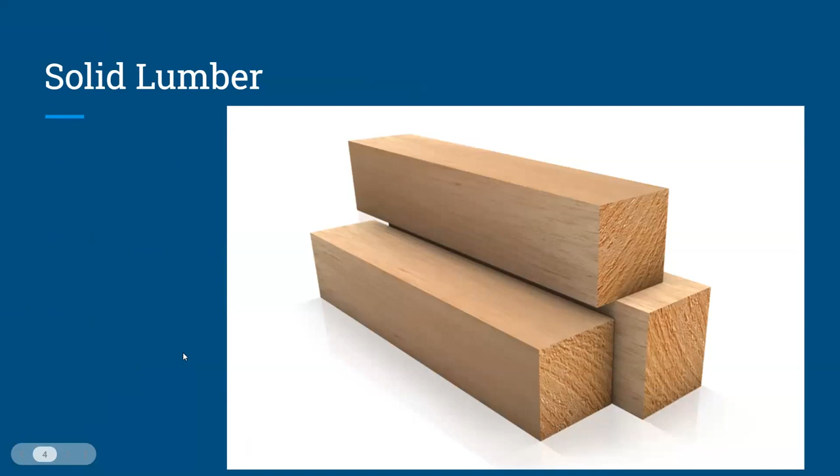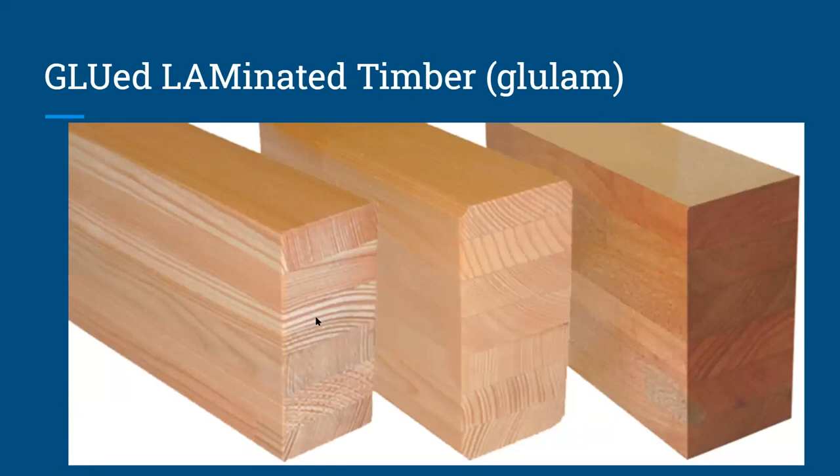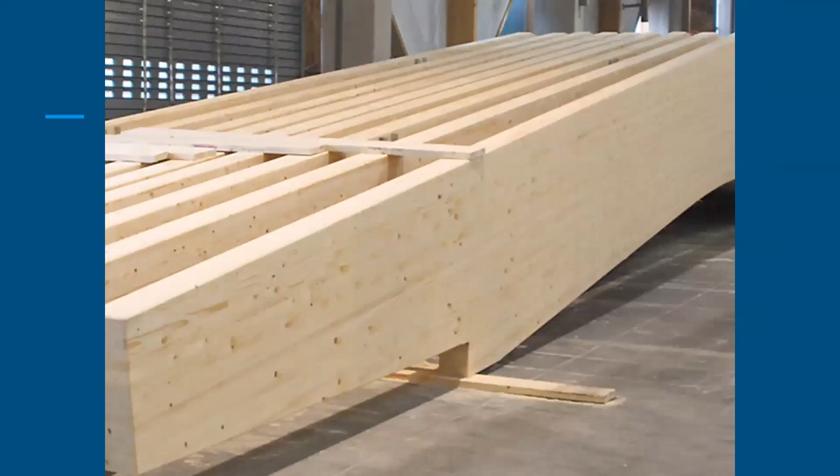Now, for the current use, as structural engineers, we can use solid timber, but increasingly we are switching to glue-laminated timber, where individual parts are glued together to form larger cross sections. With this technology, you can not only have curved members, but also very deep cross sections for columns and beams, and you can span larger distances. Timber being lightweight combined with high strength is a structural engineer's dream. Today in the United States and Canada, 95% of houses are made out of timber, whereas it is less than 5% in Turkey.

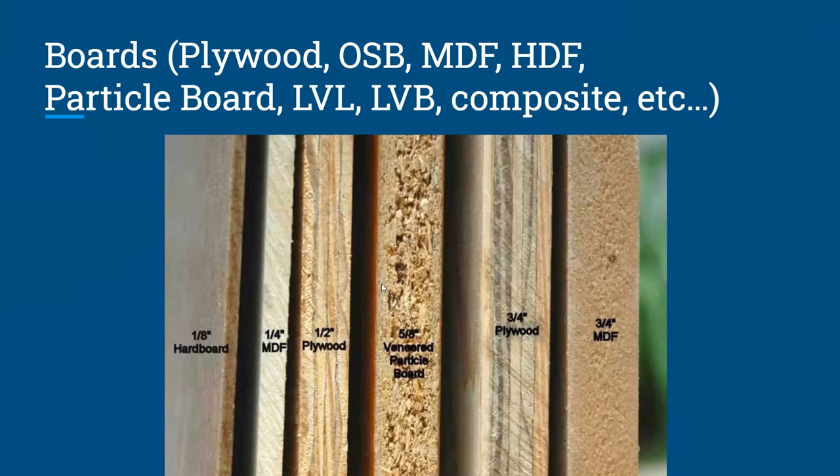There is a relatively new technology called cross-laminated timber. It is like glue-lam, but the orientation of the members alternates 90 degrees to each other, so that you get a plate that can be used as a shear wall or for the slab. Finally, all the sawdust from cutting timber can be glued together to make particle boards—MDF, HDF, or coarse particle woods—or you can shave timber from trees into thin slices and combine them as plywood, LVL, LVB, and other materials.

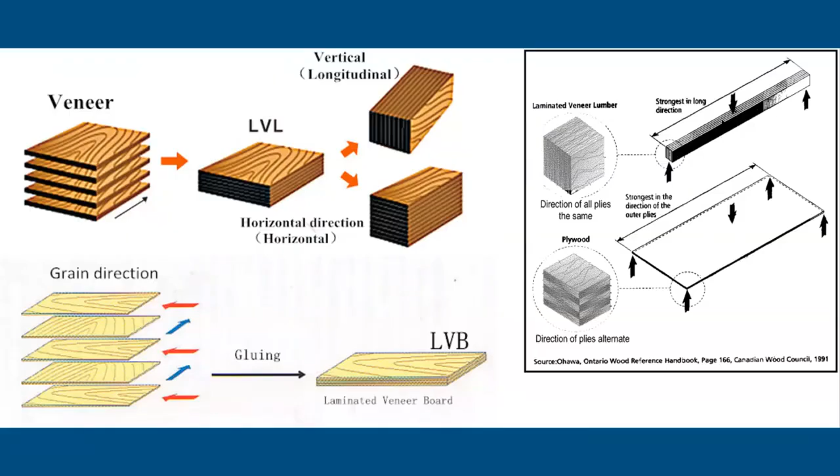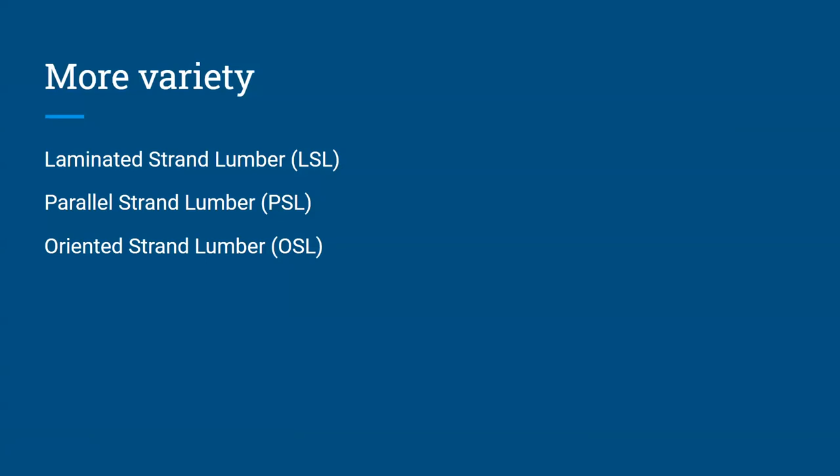There's a major difference between LVL and LVB or plywood: the layers are either 90 degrees or parallel to each other, at 0 degrees. So they are used either as a plate, or as a beam, as a structural element. There are more varieties—there's no time to go into each sub-segment—laminated strand lumber, parallel strand lumber, oriented strand lumber, and composites, of course.

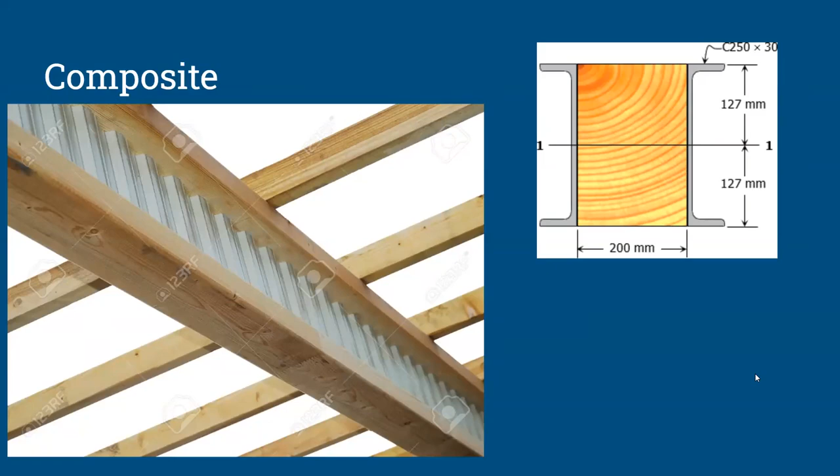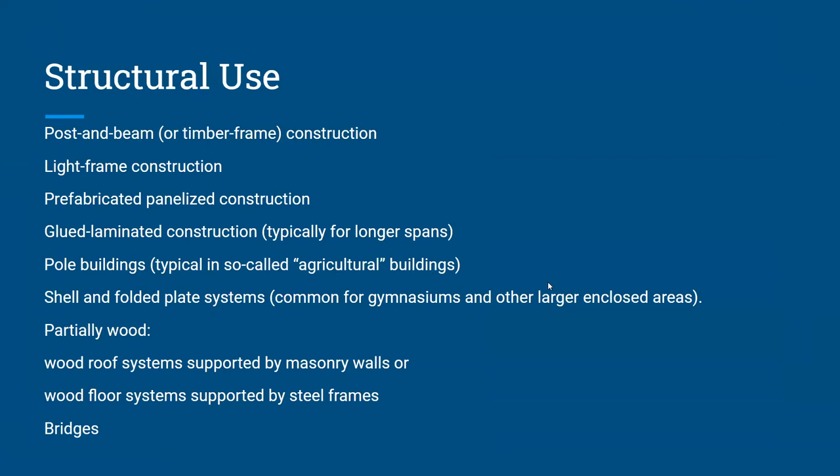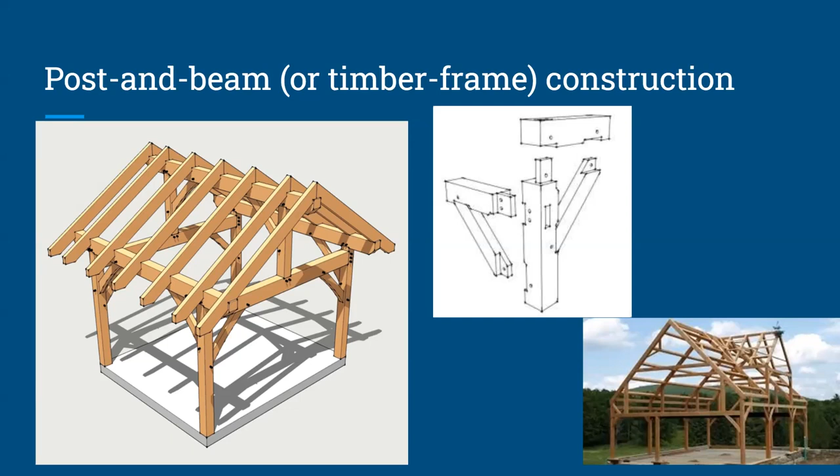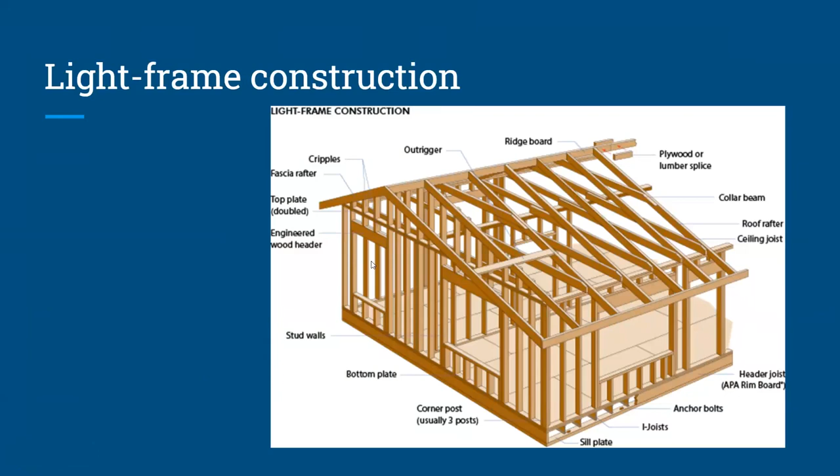The structural use of these materials can be categorized in a variety of ways. I will mention a few that are most frequently used. Post and beam method is just like what we are used to with reinforced concrete—we have columns and beams made out of timber. There is light frame construction where the load is carried by the walls instead of columns, as you see here. This is very frequently used in America too, for private houses as well as apartments.

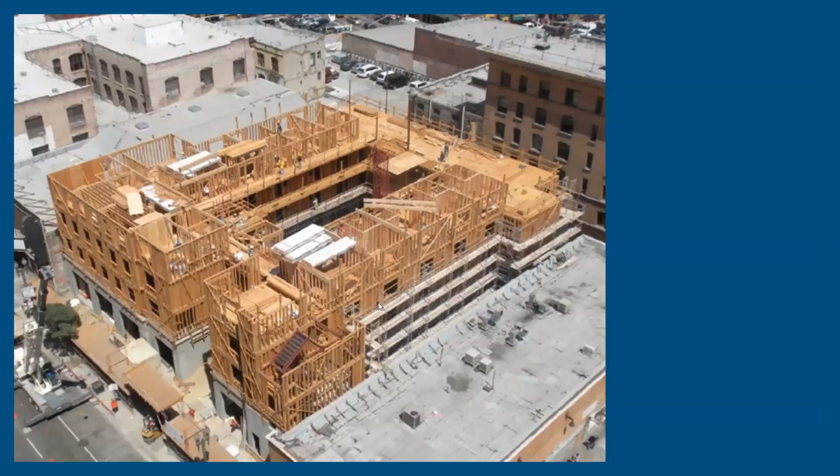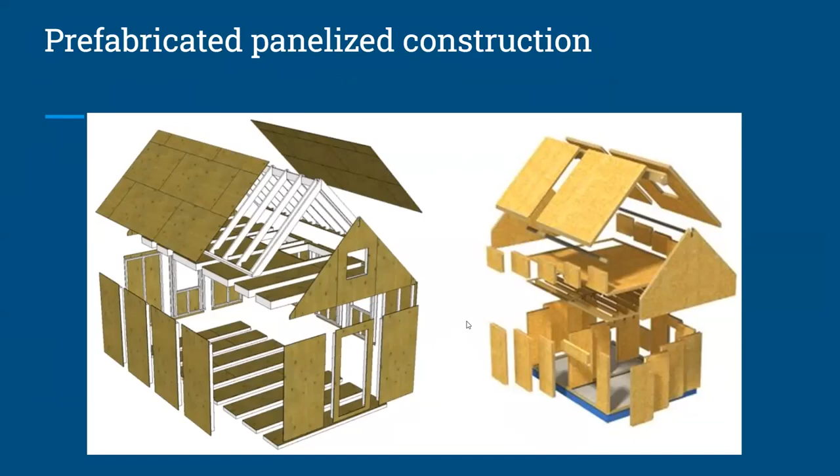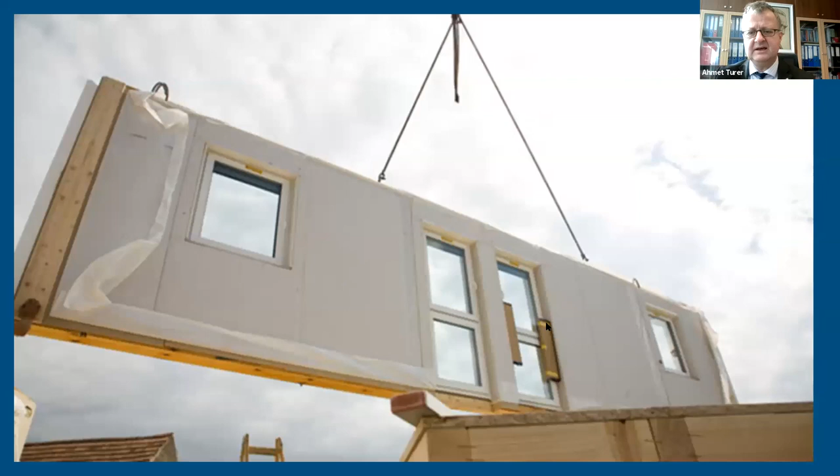You can go easily up to 10 floors. Sometimes the first floor is out of reinforced concrete just to keep the humidity out, but it is not mandatory. There is the prefabricated version where most of the construction is completed in a factory and combined on site, which is very fast construction. There are some nice examples, as you see here. Sometimes it even comes with the window and door openings already installed. This CLT construction is an example of prefabrication, and it's very fast construction.

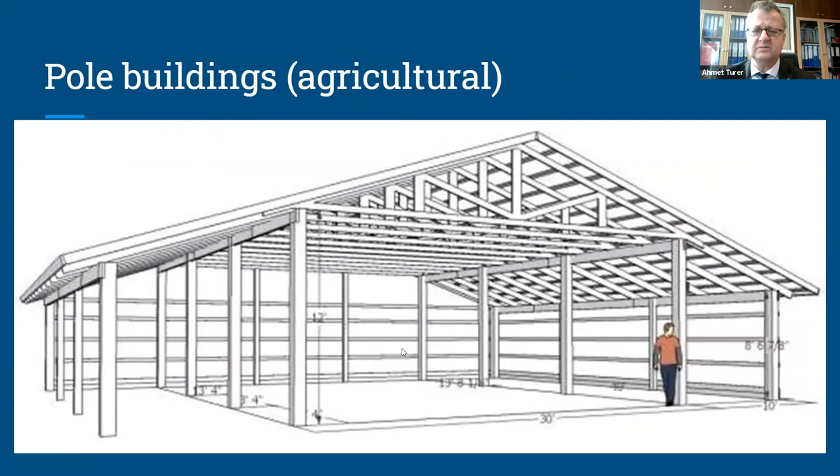There are also pole buildings. This is agricultural and not very frequent, but I wanted to mention it anyhow. The columns are made out of poles like timber tree trunks, and this is frequently used in the countryside.

Historically, Turkey had wooden houses since the 16th century. There was a very big earthquake in 1509 in Istanbul, and the Sultan back then commanded that all houses be constructed out of timber from now on. For the last 500 years, up to the 20th century, it was timber most of the time.

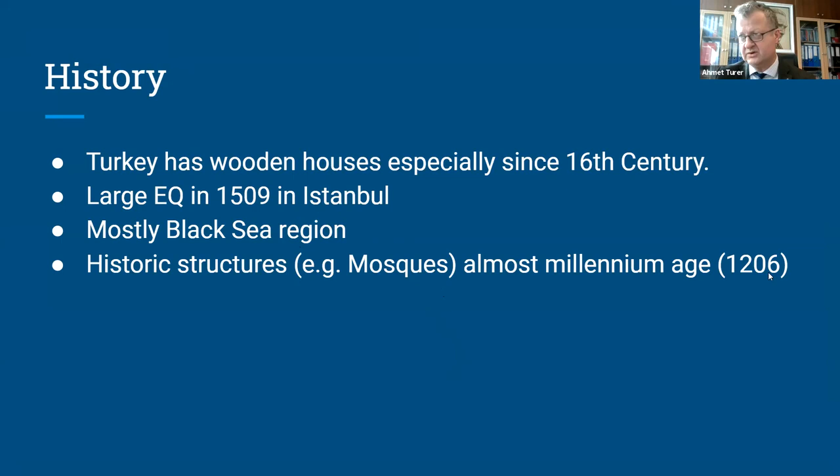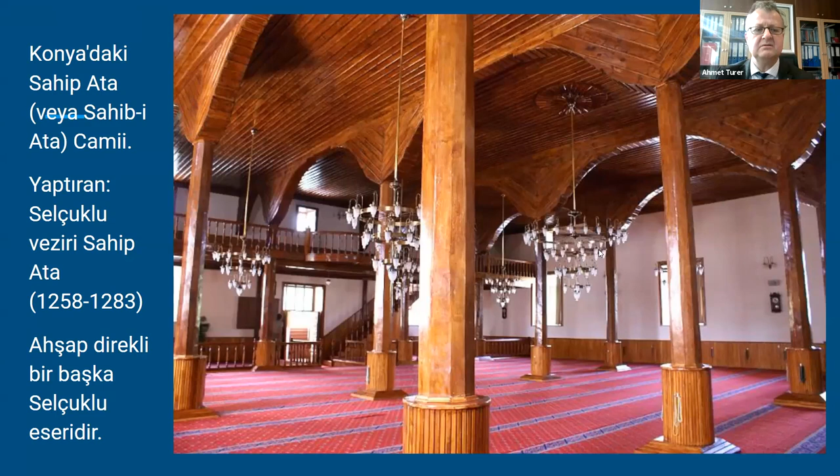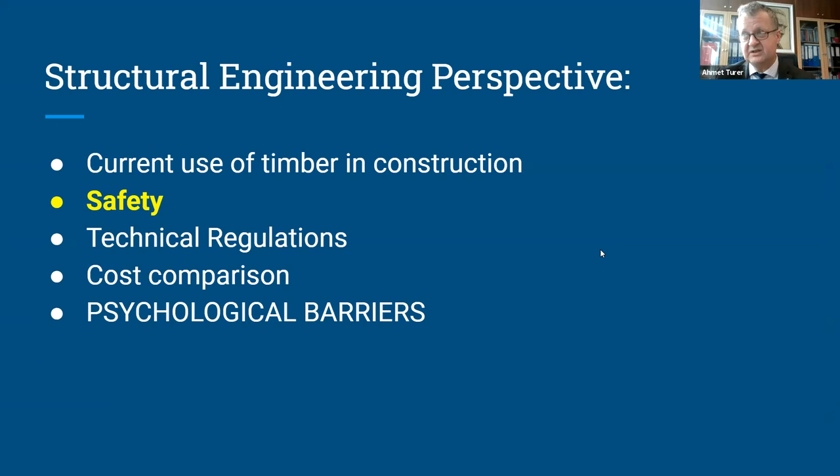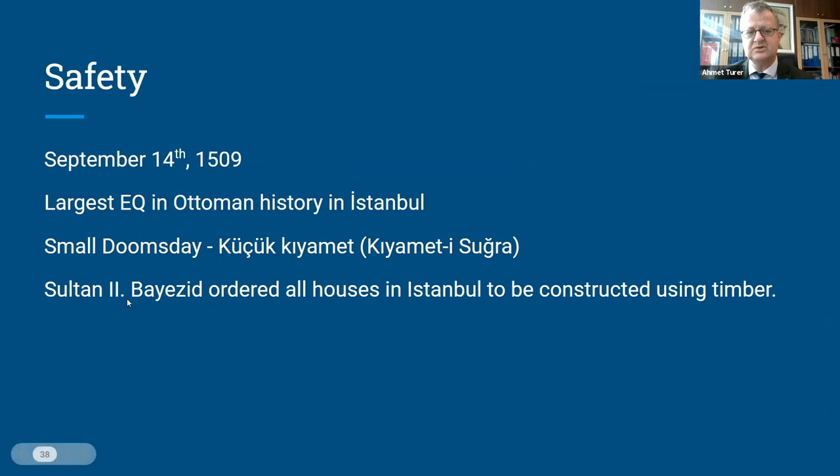This was a general overlook, so to make better use of my time, I will go a little bit faster. When it comes to safety, Sultan Bayezid II ordered as I have told you, based on a very basic principle known since the 16th, 17th century. Well, Newton knew this when he had the apple falling on his head: force is equal to mass times acceleration. Acceleration is the earthquake, and if you have a light mass, then you have a smaller force.

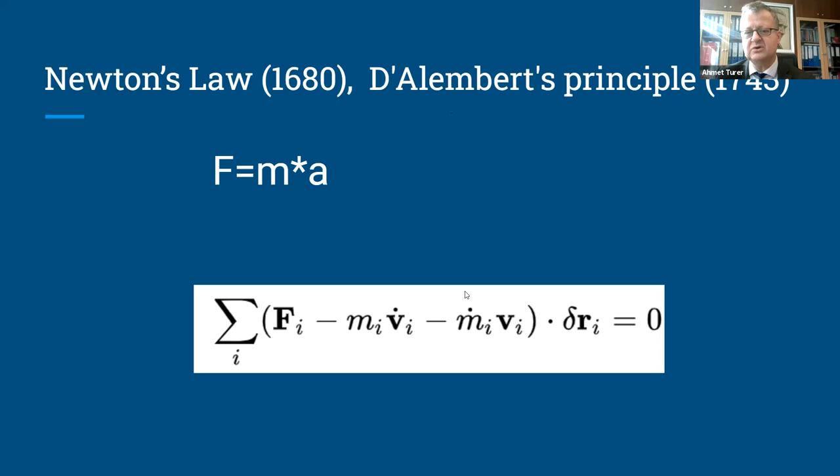So D'Alembert's principle also falls into this, even Einstein's. But to make things simple, you can imagine a structure on a vehicle, and as the vehicle is accelerating, the inertial force acting on it is going to be in the opposite direction.

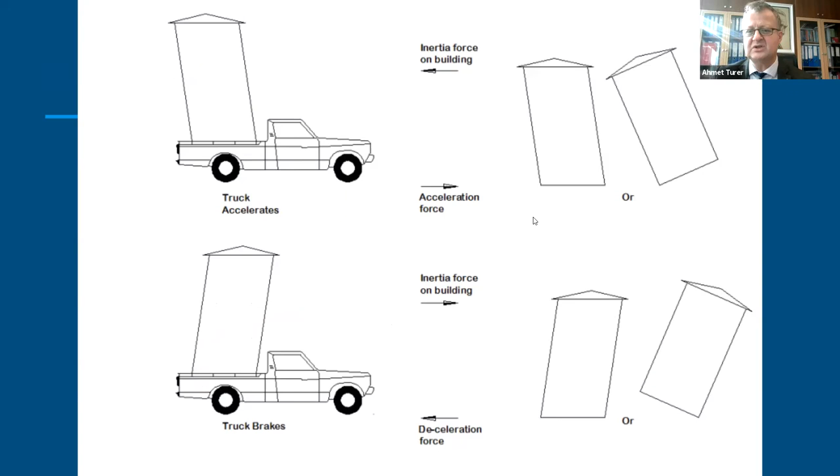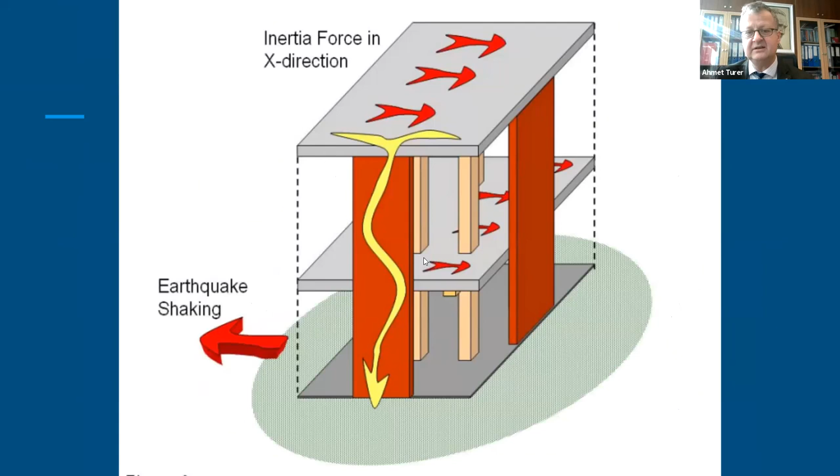So earthquakes are just like that. If you have a light structure, the forces are smaller. And if you have a strong material, then your building wouldn't collapse. So with timber structures, our capacity is high and our mass is low. So it is the perfect combination.

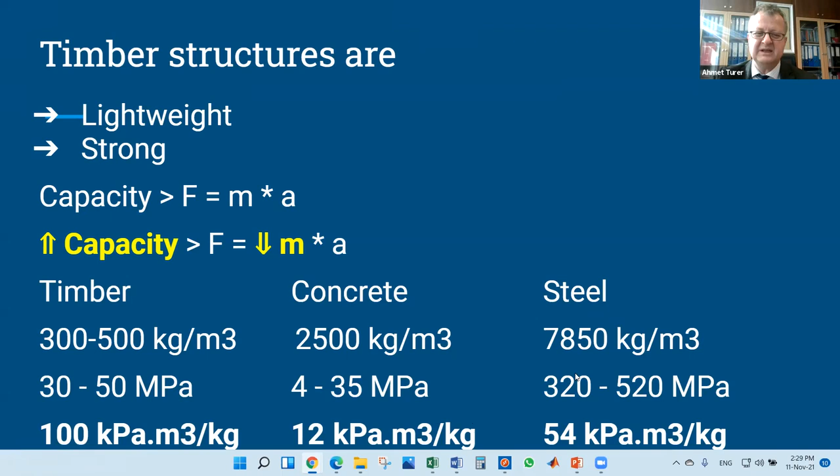So if you normalize with respect to the mass, timber looks stronger than all when you normalize with the mass. So we have up to C50, 50 megapascal timber in softwood, up to 80 megapascal in hardwood, and these are all characteristic strength. So 80 megapascal means 95% of all of the samples you collect are going to be equal to or larger than 80 megapascal.

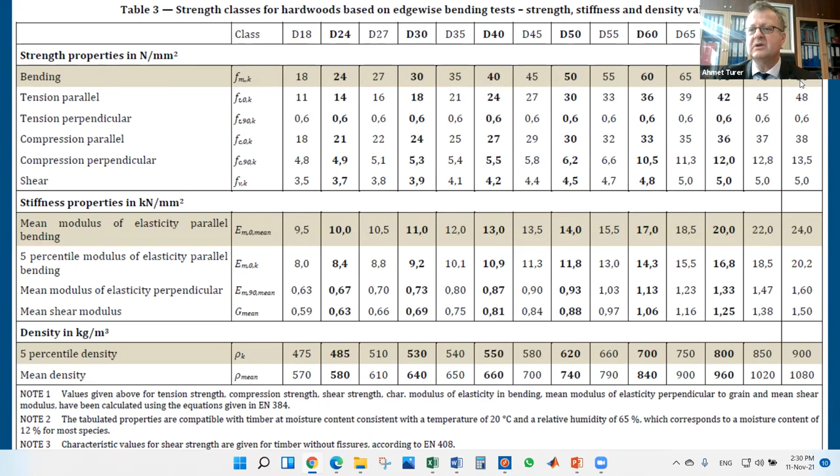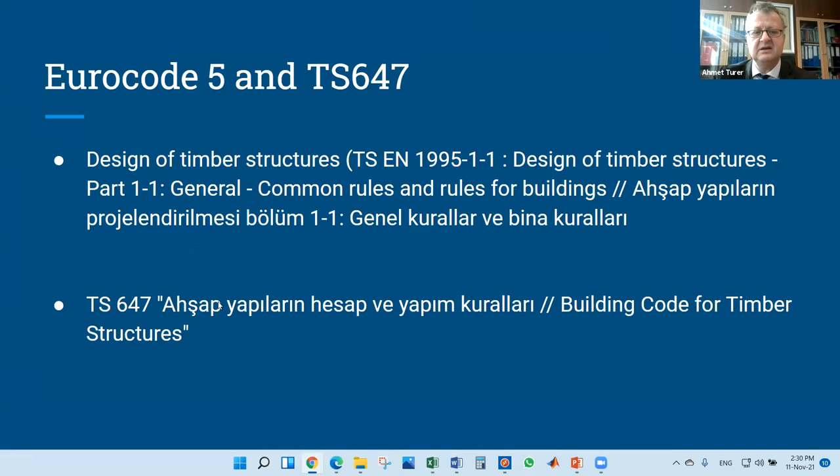Technical regulations in Turkey, we have Eurocode and TS 647 in effect, but usually municipalities and the Ministry of Environment and Urbanization produce national rules and regulations. So we will be working on this this year and next year. Hopefully they will be out soon. And also some review mechanisms and procedures for the municipalities.

This year, OGM has passed a study on strength grading of national wood. So we are pretty much ready for the usage of timber structures in the short future.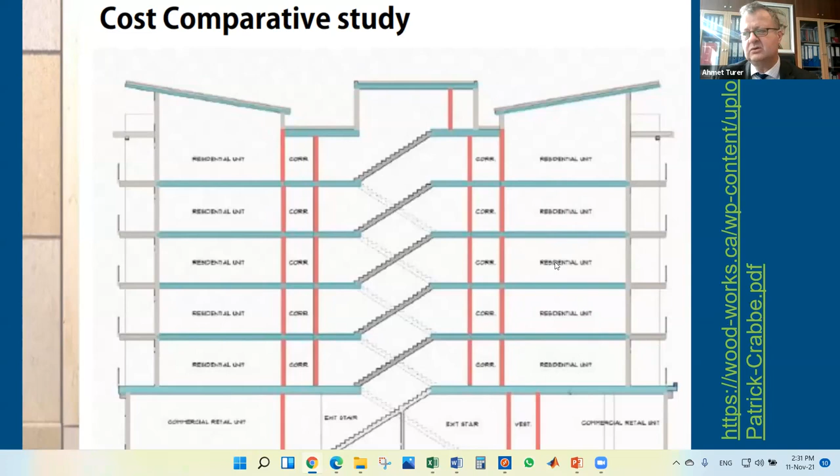Cost is very important for civil engineers and the constructors. There is a comparison study in Canada, which is, you can reach to the details from this link. They have tested a 6-story house, and they found the cost if it is made out of steel, if everything is from concrete, if the first floor is concrete with 5 levels of wood, and if all levels are wood. So as you can see at the bottom, 1 plus 5 or 6 floors of wood always has a better cost advantage, like 11 to 12%.

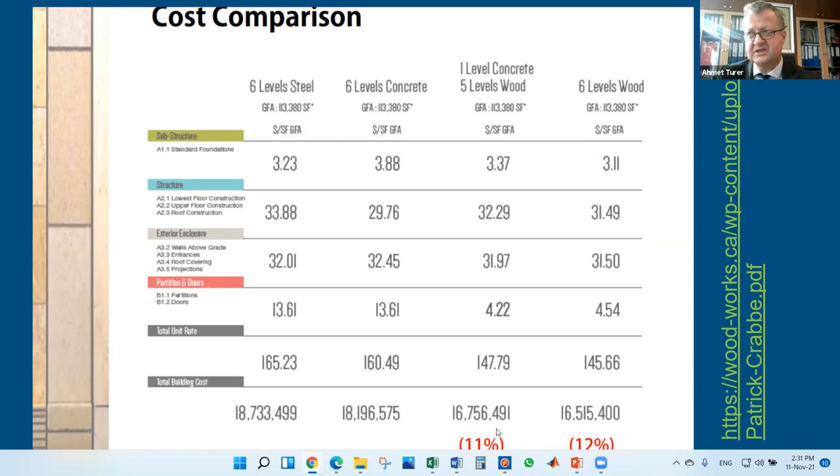And this doesn't include the early finishing, which Helena has just mentioned.

Now, about the psychological barriers. These are some of the barriers that even my wife has, so we argue every now and then. People think timber structures are weak against fire, that bugs would eat them because they are organic. It would degrade and corrupt very quickly, and there might be mold, whatever, so it won't last long. And it is difficult to heat during winters because poorly heat insulated, and it is not as strong as concrete and steel.

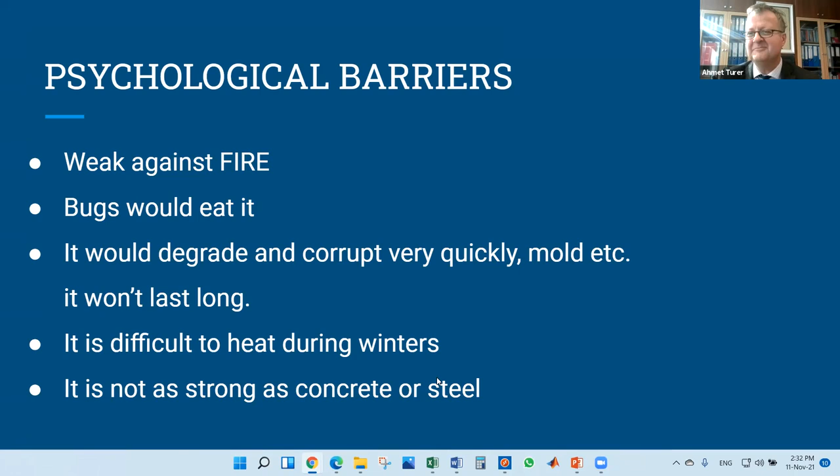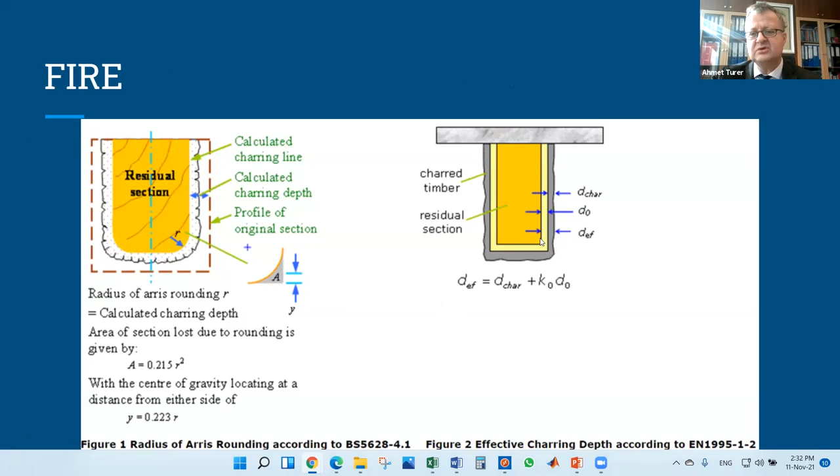I think I have just ruled out the last item, but if you think about the fire, actually, it is much better in many of the cases because it burns out slowly, and this charcoal develops, so you can easily attain this 60-90 minute requirement. Whereas for concrete, if your tension rebars are melted or exceeding 600 centigrade degree, then you could lose your beams. The same thing for steel. And in a fire, you can easily go up to 1000 centigrade degrees in less than a minute.

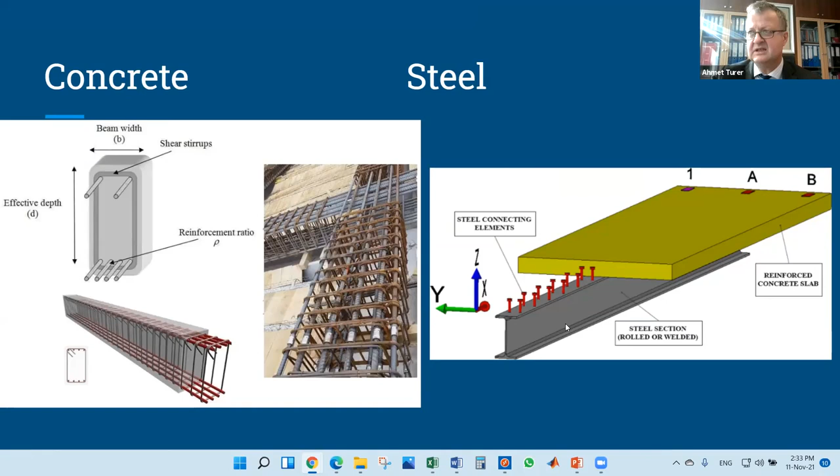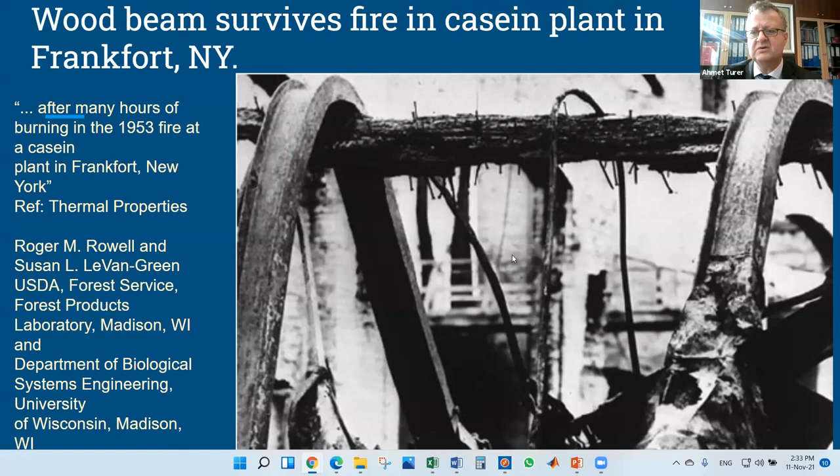So here's this famous photograph of timber surviving the fire, the steel and rebars from the concrete just lie on it. So this is very often seen.

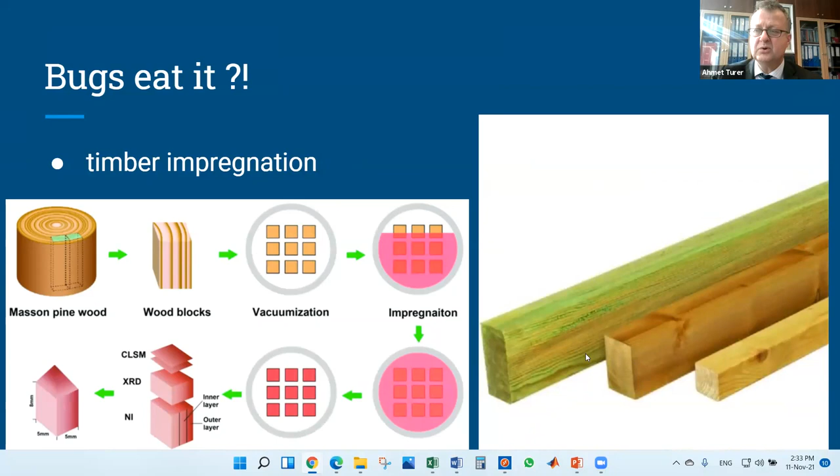Bugs can eat timber, but there's timber impregnation that if you want, you can have some post-treatment of timber to protect it from mold, humidity, and bugs. So it is done in big storage tanks, and these chemicals go in once and then it stays there.

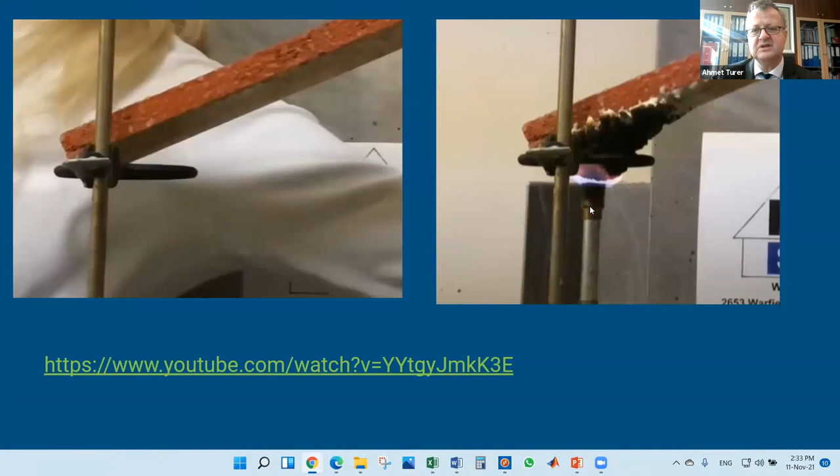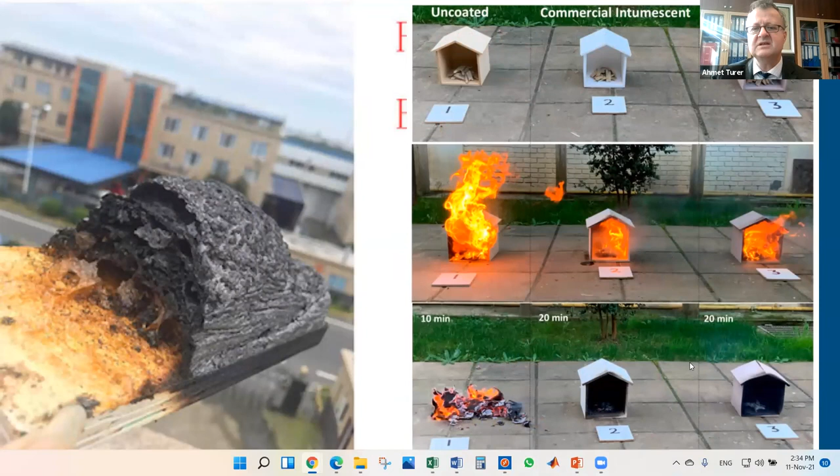Or you can have some sort of varnish on the surface, and when the fire comes in, it just expands and doesn't allow the oxygen to pass into the timber. So you see 3 examples here that with the treatment, it is clear until the fire comes in, and then your structure doesn't collapse and doesn't burn. It is called intumescent painting or coating.

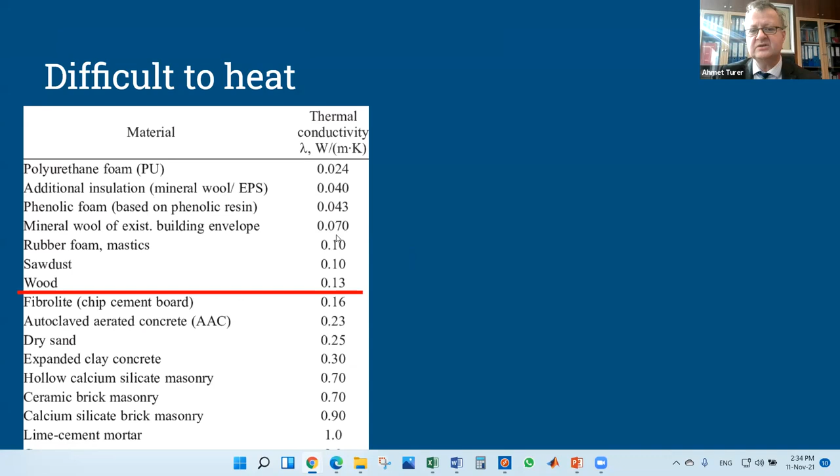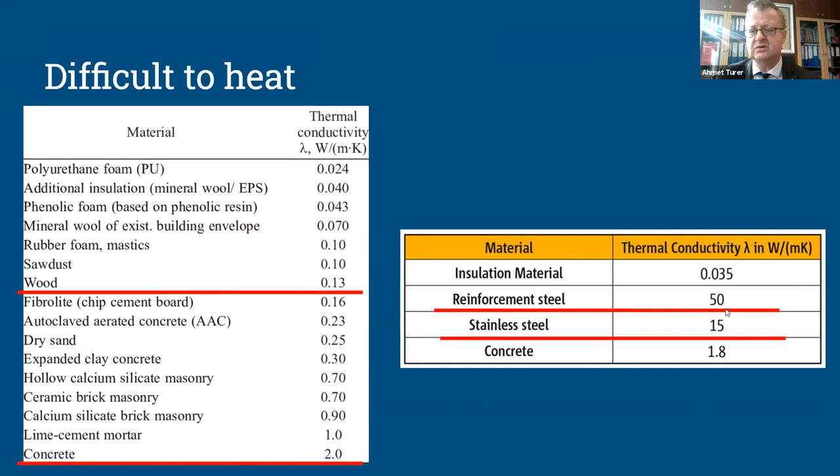When it comes to difficult to heat or warm up, the wood has a thermal conductivity of 0.13. It is just next to the insulation materials, 3 or 4 times this. But if you compare this with concrete, you see that concrete has a much larger value, 0.13 versus 2.0. So steel is nowhere near, it is more than, I don't know, 100 to 300 times.

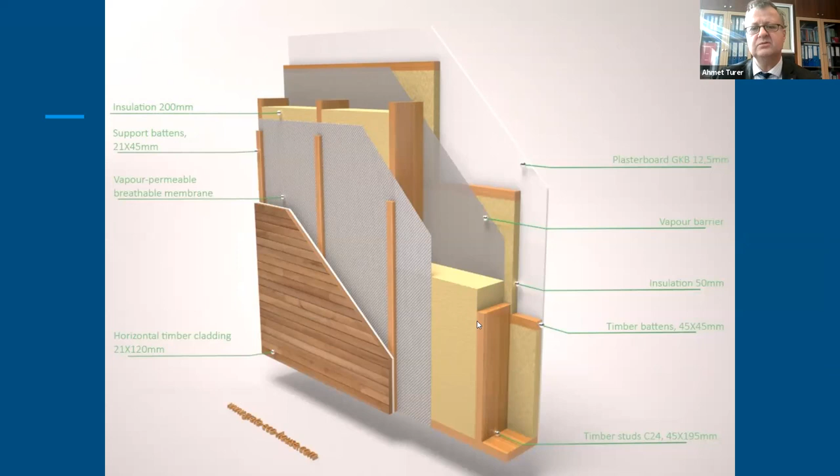And if you use some foam, thermal insulation foam between the voids, then it is the perfect thing to use for winter and summer heating and cooling. So you can see the thermal insulation here in addition to the timber, which would make it perfect.

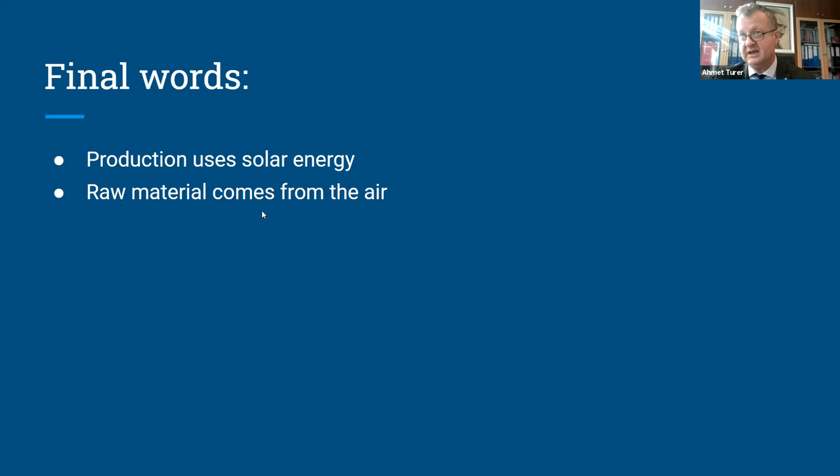So for the final words: production of timber uses solar energy because, as you know, all of the plants through their leaves use solar energy, and the raw material comes from the air, which is carbon dioxide. So timber uses carbon in the air. It has negative carbon dioxide emission and is smallest footprint compared to other construction materials.

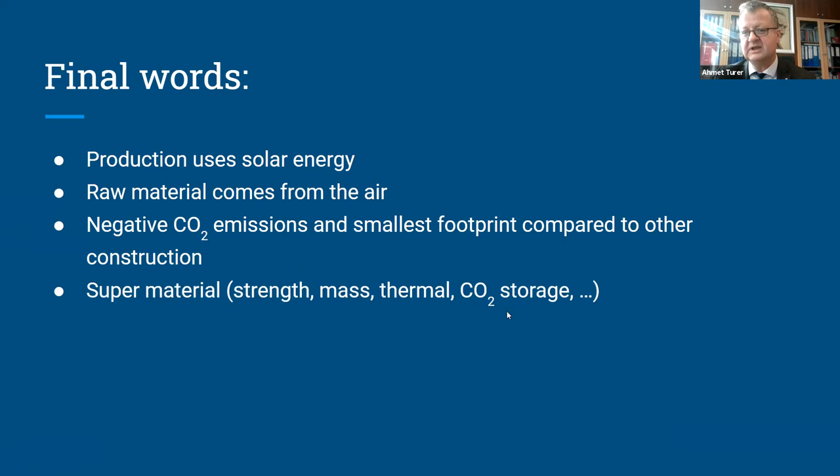It's a super material from strength, mass, thermal conductivity, carbon dioxide storage, and things like that. It has advantages for earthquakes. 95% of the people in Turkey are living in earthquake-prone regions. By land, 95% of the land is susceptible to earthquakes. Cost and fast construction and fire, these are all advantages.

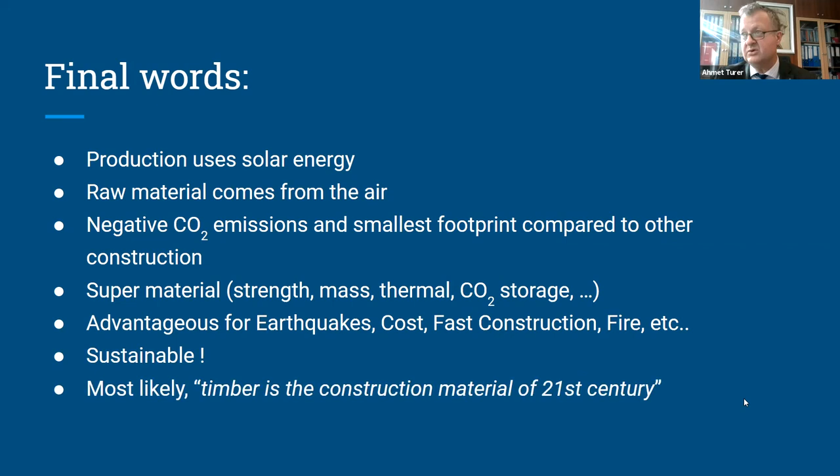It is sustainable. It's a green technology. And most likely timber is going to be the construction material of the 21st century.